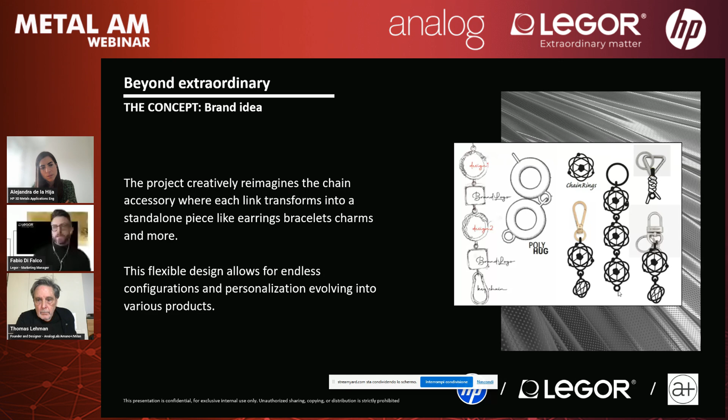Second point, we want to be a catalyst and facilitate the integration of this cutting-edge technology and the artistic and creative vision of the designers. This is a really crucial point, because when we brought this technology into our facility, we immediately noted that it is not just related to manufacturing companies, but it speaks directly to designers. Thanks to this technology, we are able to reimagine how to design a product, because there are a lot of benefits that allow designers to create something really different, to handle complex geometries that cannot be produced with the most common technologies.

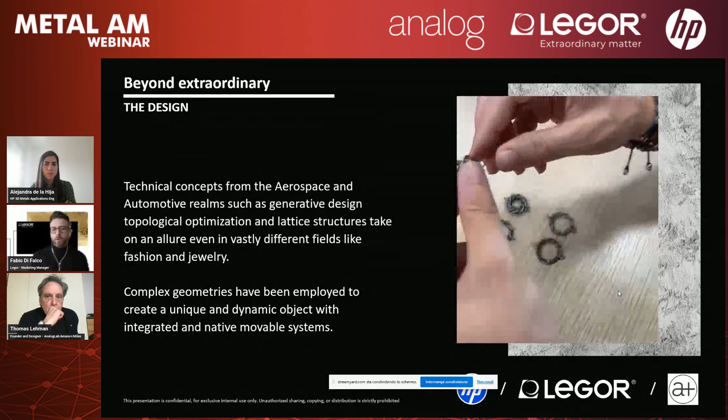In this chart, you can see something that we realized last year, part of a previous workshop. As you can see, this shape is really difficult to realize with the most common technologies on the market, like CNC, laser technology, or casting. What we noted was that design concepts already common in other industries like aerospace and automotive, such as generative design, topological optimization, and lattice structures, can now be applied also to more static markets like jewelry, watches, and fashion accessories. All those elements brought us to write down a value proposition that we can sum up through three main pillars: agility, creativity, and sustainability.

Agility, because based on our more than 3 years of experience with this technology, we can say it is really a fast technology. We do not have limits in terms of time or capabilities, and it's also a digital technology. That's why we define it as agile. We do not have any minimum order quantity, for example. We can print 1 piece, 5 pieces, 10 pieces, but also 100 and 1,000 pieces.

Creativity is the core, because, as I said before, the freedom in terms of design is really high. Also mass customization: we are able to customize the object directly during the printing phase. And it is also sustainable because we can reuse the powder. We do not have waste or scraps. But even more, we can simplify the overall supply chain. In the next chart, we can be more granular about the main benefits that led us to define this value proposition. You need to consider that the technology doesn't need any kind of stamp, no mold.

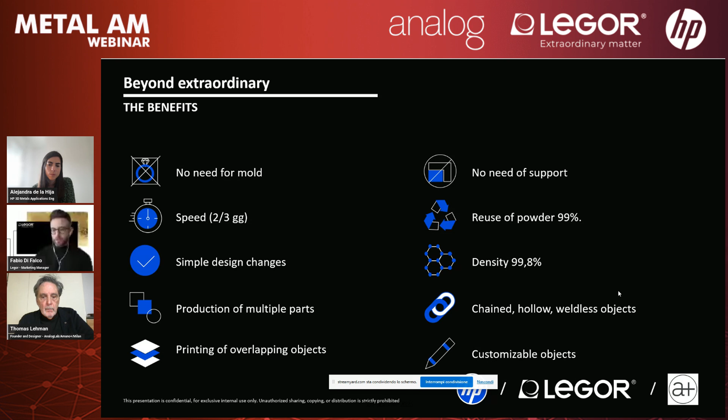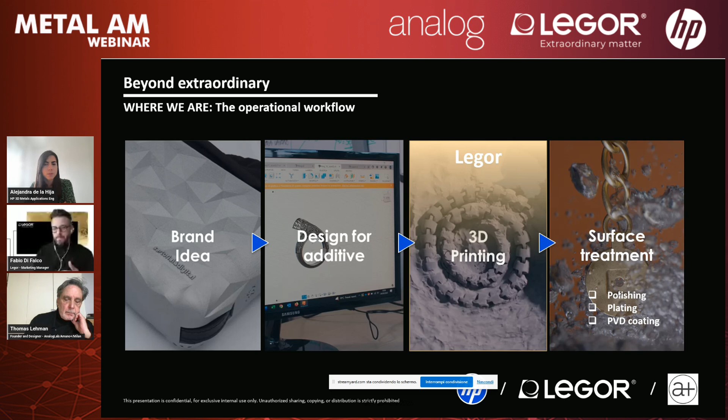So before leaving this stage to the next speaker, AnalogLab, I want to sum up: free space for creativity. We already had some different workshops, and until last year, all those kinds of concepts seemed to be just words on a deck, just some words on a presentation. That's why I'm really happy today to introduce Amano Plus and AnalogLab, because for us, we are able today to demonstrate that all these benefits and all the concepts behind the Metal Jet technology can bring ideas to life.

In fact, when Thomas and I met last year, Thomas was looking for an agile technology to bring his ideas to life, to create something different in the watch industry, which in a certain way we can define as static. But on the other hand, at Legor we want to connect not just with manufacturing companies, but especially with visionary designers.

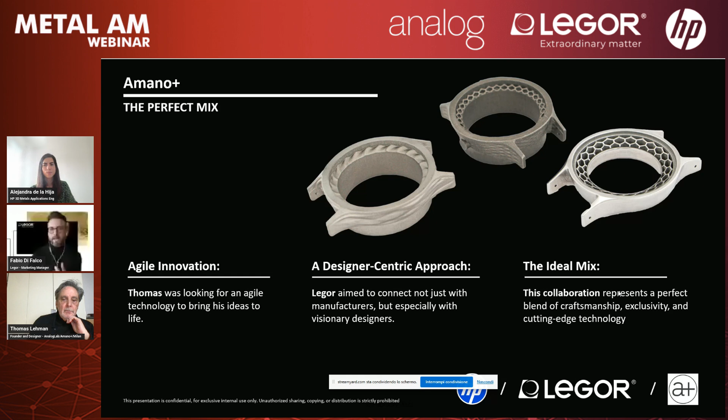That's why at the end we met with the ideal mix. This collaboration represents for us a perfect blend of craftsmanship, exclusivity, and innovation, because we were able to create the perfect mix between artisanality, design, and technology. So now I'm really happy to leave this stage to Thomas from AnalogLab. Thanks for your attention.

Fabio, thank you so much for that wonderful introduction. I really appreciate it. We'll just go right into the slides; I think they're fairly self-explanatory. My name is Thomas Lehman, and I'm the founder of AnalogLab. We're a traditional, or I guess we would say now, a non-traditional design firm. What we're talking about today is the birth of an idea, which is the foundation for this presentation.

We're a Milan and Seattle-based design firm, and I've been a designer and educator for more years than I'd like to admit. For over 15 years we've been Milan-based, and we've developed branding designs and strategies for a wide range of companies, including Ferrari, Maserati, Nike, Prada, Starbucks, etc. At some point, we decided we wanted to look at projects that we could own, that we could control as we're going through it.

So Amano Plus is a passion project, and it comes from my curiosity, which is to always push the studio beyond our creative boundaries. We were really early adopters in 3D printing. I actually went to Brooklyn and bought a printer from the garage of Bre Pettis, the founder of MakerBot many years ago. And while the machine itself never really worked or produced anything, it was the step into understanding how this works and how the future is going to be. So that stimulated my curiosity.

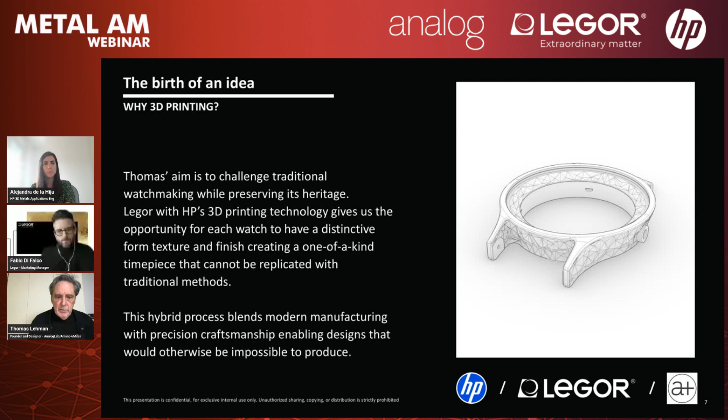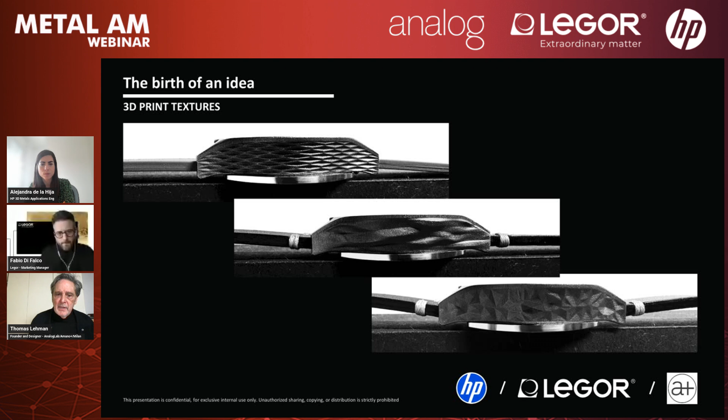And one of the things we're able to do is work with the texture and the result of 3D printing, which I believe is a new design language. It has a certain look, a certain feel, and it allows us this incredible freedom to add textures which we could never do in any other way. Here you see 3 examples from the current watch collection we're working on. All of these are straight out of the printer with a little bit of sandblasting to give them a final finish, but this is exactly how it's finished.

And what's interesting is that we add our process of CNC post-processing, which brings very bright and shiny and kind of brilliant areas to the project also. So there's this really beautiful contrast of super refined and a little bit grezzo, as you'd say, or rough in the business.

So the benefits of this is it enables designs beyond traditional manufacturing methods, uses recyclable materials, and creates minimum waste. We can create this unique texture and surface finish, openings, and since it doesn't need support, we can have almost complete freedom in the design we're doing. And we incorporate this idea of CNC post-processing and hand finish for the total look of precision craftsmanship.

So each Amano timepiece, most importantly, is customizable by our customer, you, with our online configurator, allowing you to create your very own bespoke timepiece. And again, as we grow our library of designs and our library of ideas, this creates something that can be very compelling in the marketplace.

We're currently in pre-launch phase with our first collection right now. We'll ask Fabio at the end of this conversation where we're at, but we're very close to finishing our final details on the work that we've been doing back and forth, which has been a really interesting, precise and well-supported process by Legor and HP. And I have to say I'm super appreciative of that.

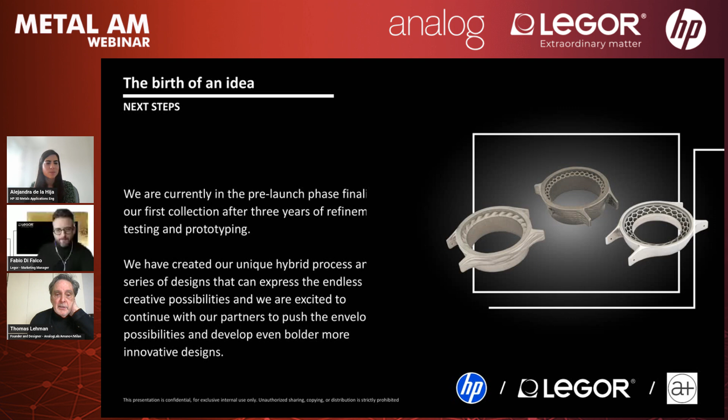So the next step for us is to really start to look at what are the possibilities. The plan is for Amano Plus to start with timepieces. There's a couple of reasons. There's a possibility to control the costs because of the size and the cost of the printing, but secondly, because of the quality and the craftsmanship and the handwork we're putting in it, to actually gain a fairly premium price. So we look at these two balances going forward, and this is just the start of where we're going to go with this brand.

And I have to say, honestly, that as we go forward, I'm always impatient to try and move faster and try and get things done sooner, and learning step by step to get things in the watch industry perfect is the most important thing you can do.

So each timepiece is brought to life by you, our customers, by utilizing our online configurator, allowing you to be a partner in the creation of your timepiece, which to me is a very important thing. The result is a timepiece that is completely unique in the watch industry, allowing our customers to create their own bespoke timepiece. We call this process tailored time. It's a little hint to the way things are done in Italy. While we are at the beginning of our journey, the response that we've had so far has been super positive.

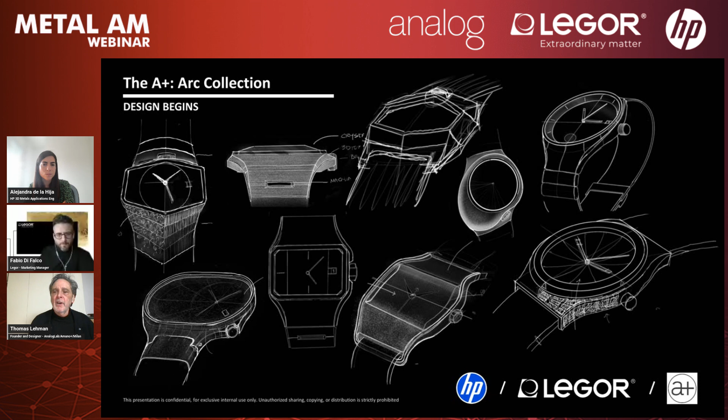These are just some quick sketches of where we're coming to in the future. We have almost unlimited possibilities to create new ideas and to provoke this market that is, as Fabio mentioned, very static and very straightforward.

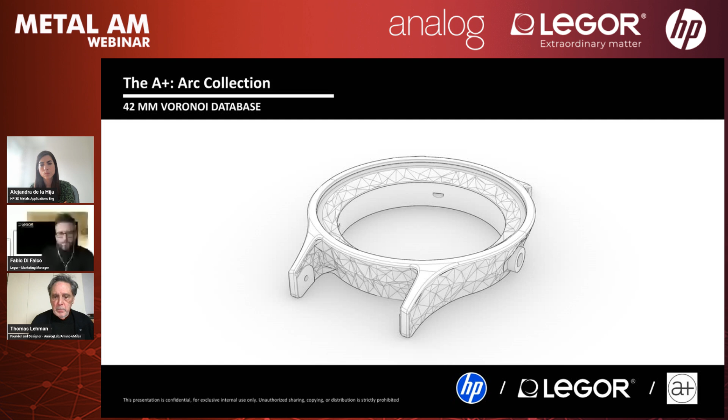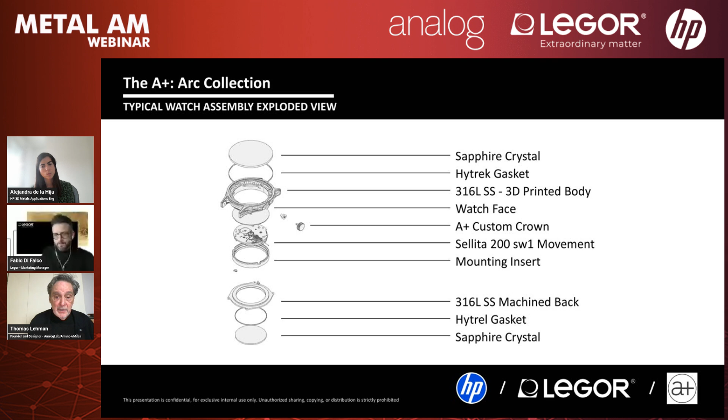Here's a couple of pictures of some recently completed stainless steel parts. And this is just a basic breakdown of all the assembly pieces that we use when we put it together. It starts with sapphire crystals and the 316L stainless steel body, and we're also working with Legor on bronze, which we think would be very exciting. Then we add the watch face, custom crowns, a Swiss movement, a mounting insert, and then the back with sapphire gaskets. So it all comes together to create a waterproof, almost permanent watch piece that's on par with any watch made today from a quality standpoint, but completely unique in look and feel.

So what's important to us? It's 3D printed, it's stainless steel, it's made in Italy, it's 100% configurable, it's hand assembled, and it uses, as much as possible, sustainable materials. Every day that drive is going forward, so we're always looking for ways to create a more sustainable project. For example, our watch straps are made from cactus, so we have a vegan watch strap that uses cactus leather, as we'll call it. And we'll have two sizes, a 37 millimeter and a 42 millimeter, and two different types of backs, a crystal back and a solid stainless steel back.

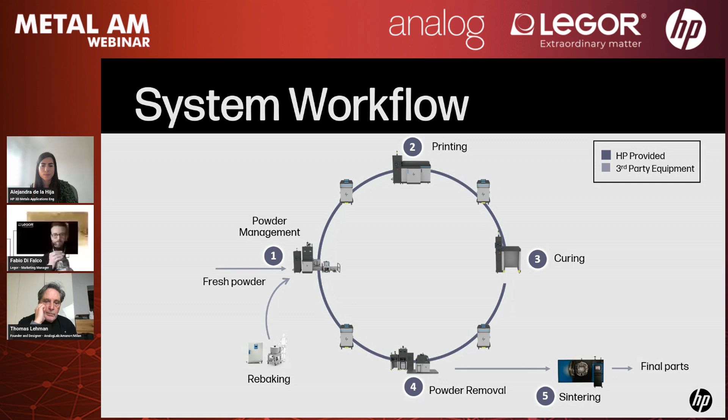For some reason, my laptop doesn't want to cooperate today.

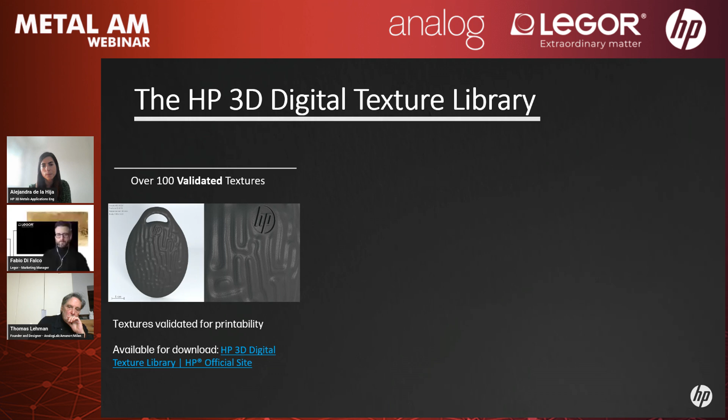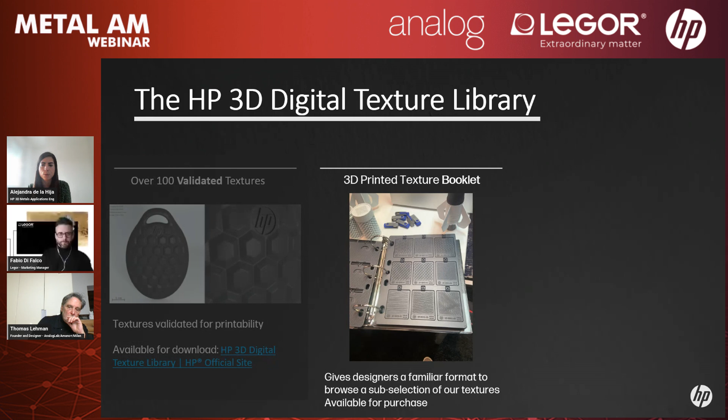Then for those designers that are looking into getting a little bit more hands-on, kind of like touch and feel, we also offer a booklet that's available for purchase with the 3D printed patterns in polymers, so you can get more familiar physically with the textures before adding them to your projects. And then finally, for those customers who just want HP to take care of the texturing, we can provide texturing as a service.

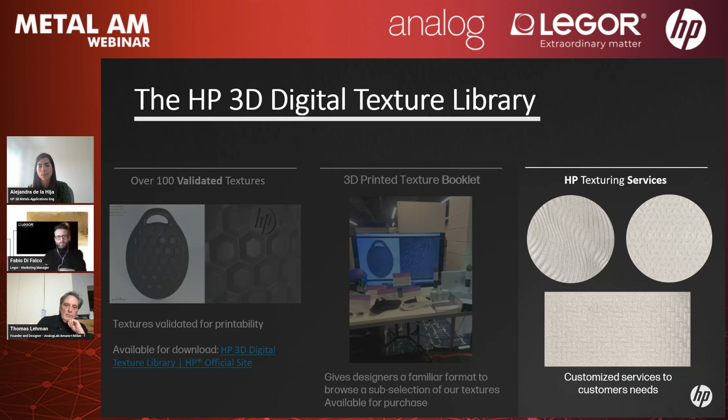And here in this image, you can see an example of products for a confidential customer I'm working with at the moment in the consumer industry, where we applied these textures to a series of their stainless products, and the products really turned out great, as you can see here in the picture.

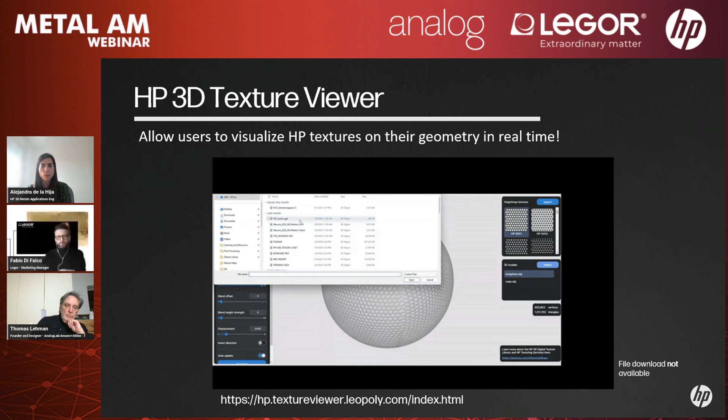So we know it can be a bit overwhelming to download over 100 different textures and experiment with them one by one. So for this reason, we also partnered with Leopoly to develop a powerful visualization tool, which you can see here in this video. The beauty of this tool is that customers can easily upload their own files into the tool and visualize in real time how different textures will look, and like this make the texture selection process way more efficient.

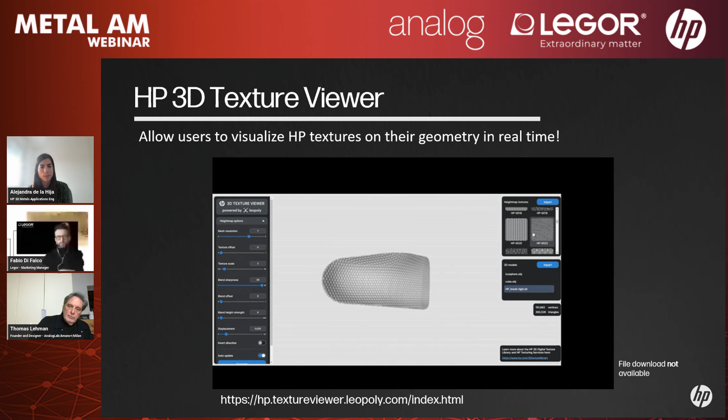So now, while the textures will allow a new degree of customization in 3D objects, we are also pushing the boundaries of design with the newly developed text-to-3D print solution, which is based on AI technology.

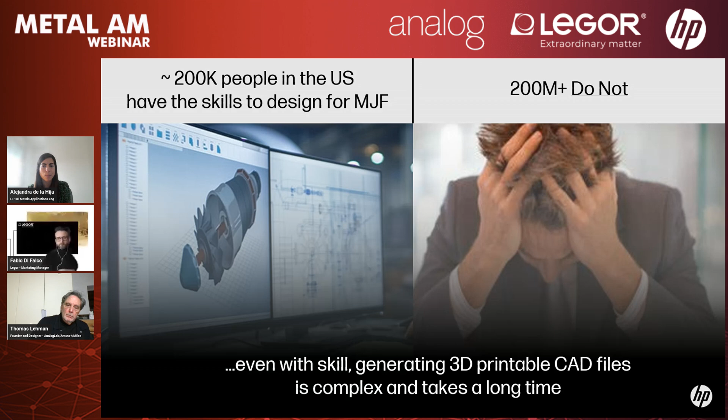Let's face the truth: most industrial and mechanical designers are more familiar with subtractive design tools rather than with 3D design tools. This skill gap is really limiting the adoption of additive manufacturing. For this reason, HP saw the need to develop the text-to-3D print solution, which enables users to create ready-to-print 3D models with simple text descriptions, making digital manufacturing way more accessible.

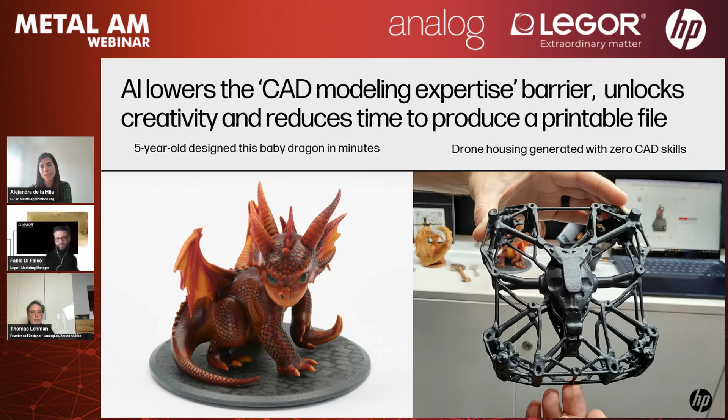There are several AI-powered 3D design tools in the market, and what makes HP's solution unique is its ability to be vertically integrated into the customer's organization. This means the AI can learn from a specific customer's needs and inputs in a private and secure environment without contamination from other customers' inputs. It also implements design rules for additive manufacturing, so we can guarantee that the generated models can actually be printed and produced.

Another key advantage that I really like is that it allows hybrid designs, allowing users to integrate existing geometries with AI-generated components. To help you understand this better, I have a couple of examples.

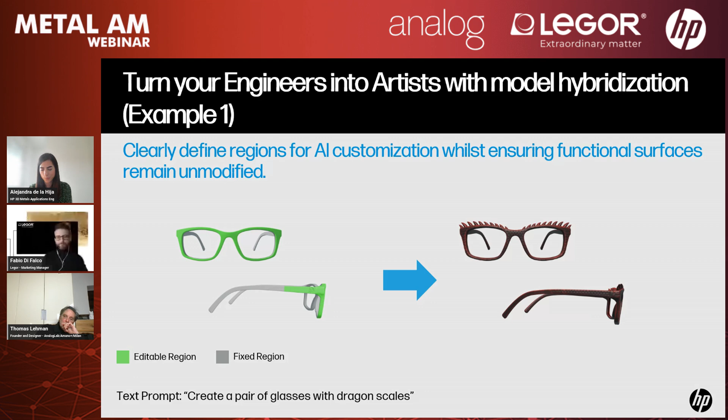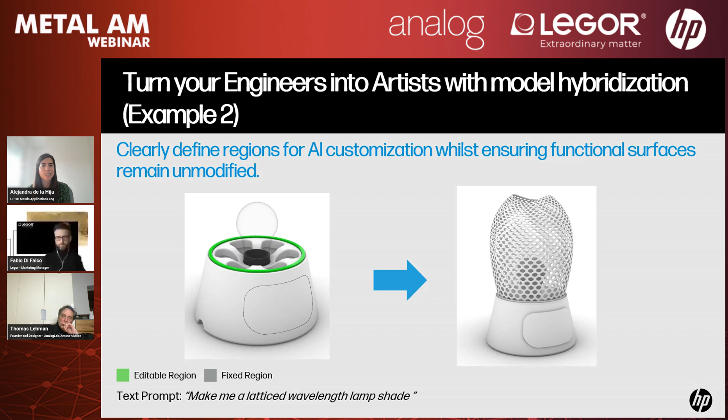Another example here is for a lamp, where we have the base of the lamp created and just want to play with different shades. So we input the 3D model of the base, mark which areas need to remain untouched and which can be modified, and in this case we wanted to create a latticed wavelength lampshade. Here you can see one of the examples the tool provided.

We showcased this video at Formnext in autumn last year, over 400 different times, and the feedback we got from the market was really positive. So we're looking forward to how this will help us scale further in the market.